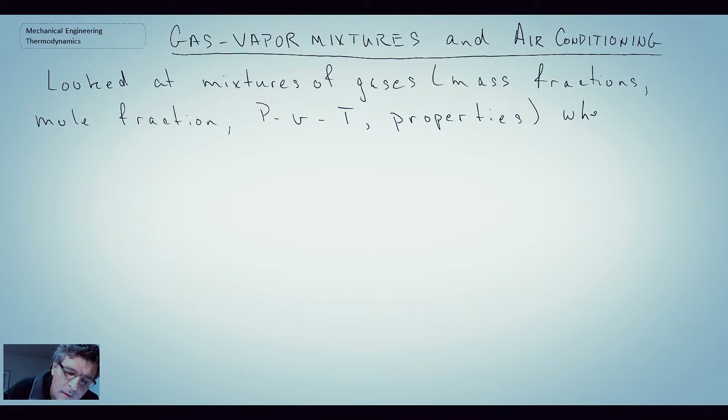So we're now going to look at the situation where one of our components can go through a phase change. And I mentioned that an important application of that is the mixture of dry air and water vapor, which pertains to heating, ventilation, and air conditioning systems.

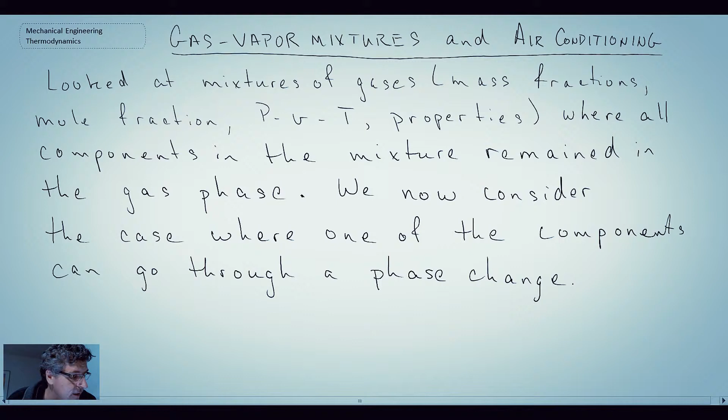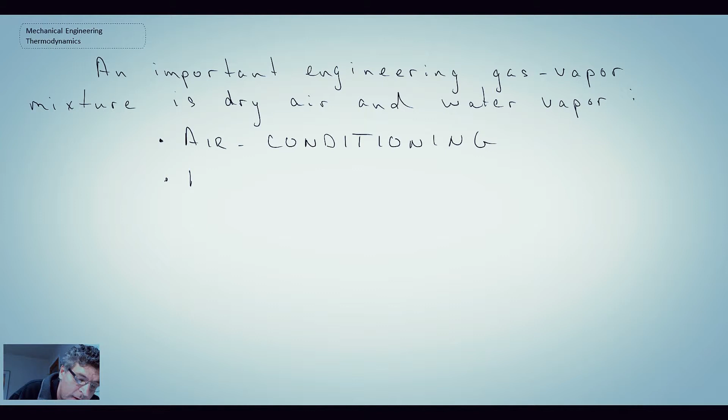So air conditioning is one of the applications. Another one that we won't particularly or specifically look at in this course, however it is important, is atmospheric sciences.

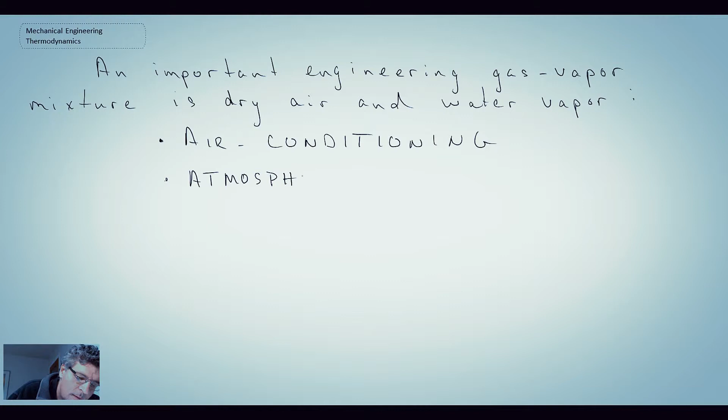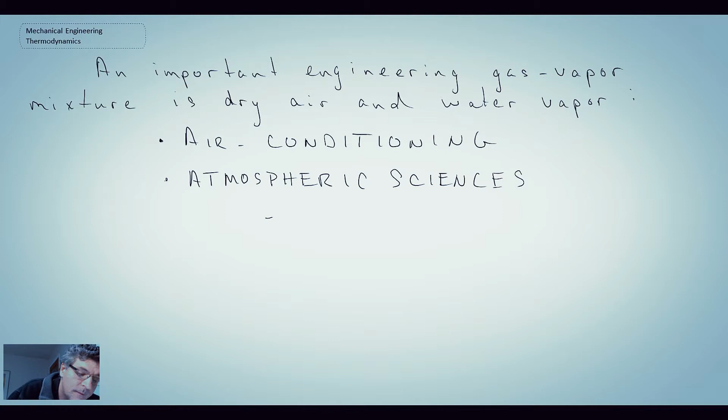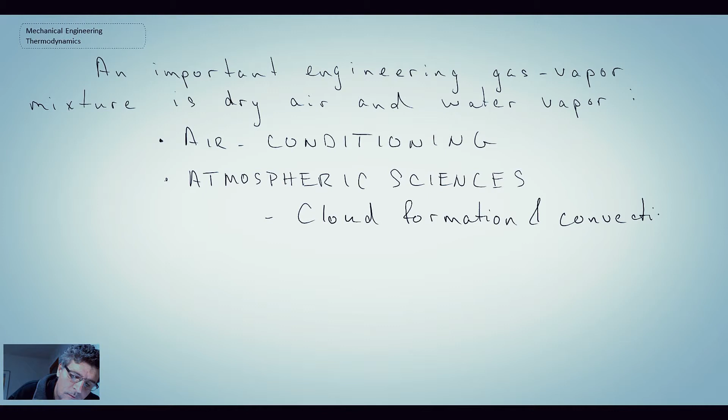Processes such as cloud formation, short and long wave radiation, or radiative flux coming from the sun and then energy being radiated back into space. That all kind of couples together with climate change.

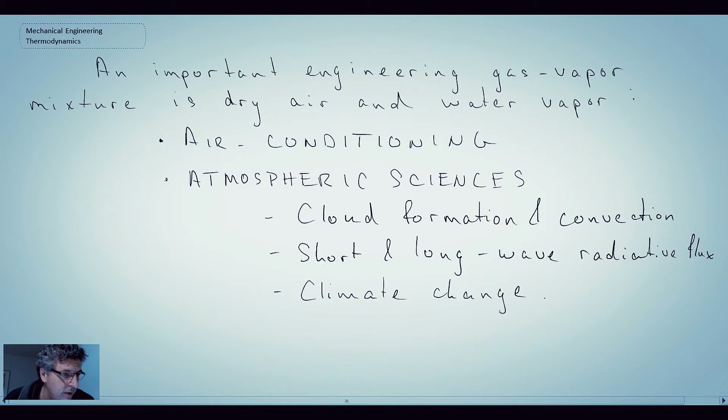So when we look at global climate change, one of the big uncertainties is the contribution of water vapor in terms of the modeling efforts, and consequently this is quite an active and important area for people doing atmospheric science studies. We won't be looking at that in this course.

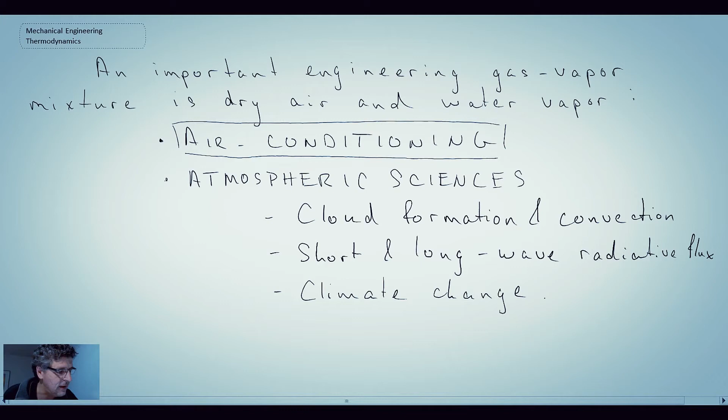What we'll be sticking with mainly is dealing with processes involving air conditioning, which is typically where mechanical engineers would contribute in this area. But as we're doing this, we will be considering air to consist of two parts. One part is dry air.

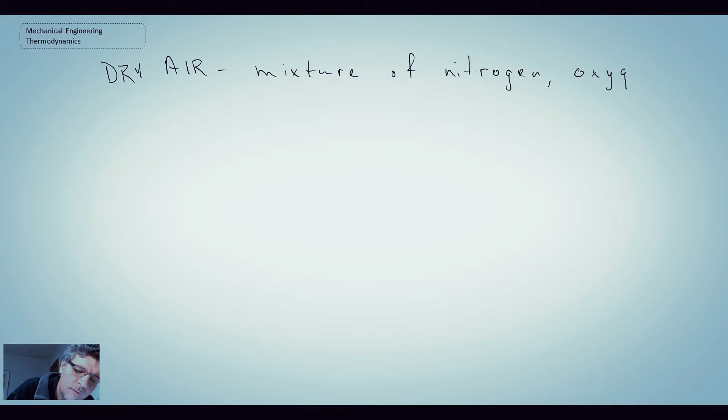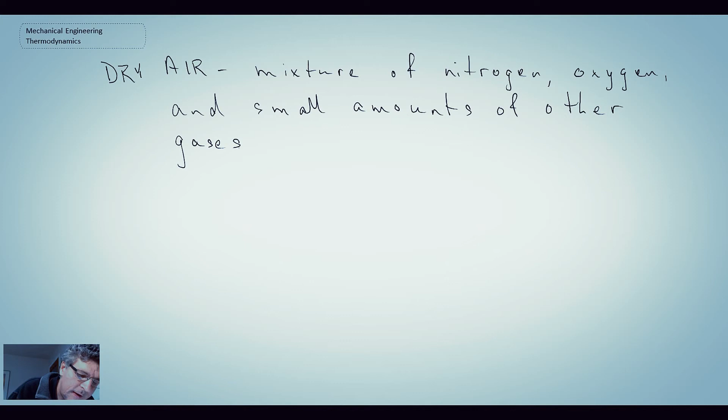And so this is typically air as we usually think of it. Typically we think of air as being mainly nitrogen and oxygen and then small amounts of other gases. However, when we talk about dry air, we are implying that there is no water in the air.

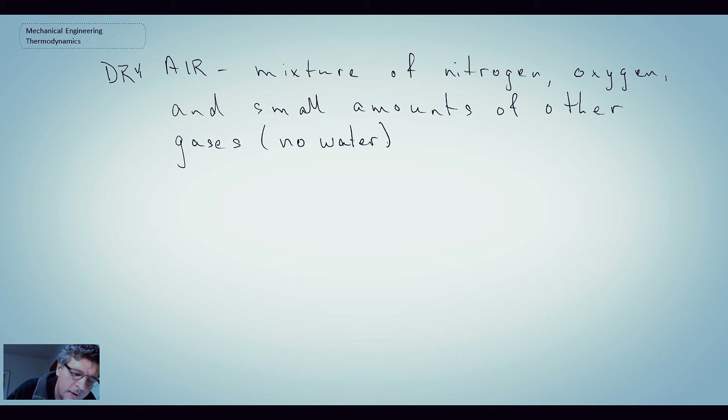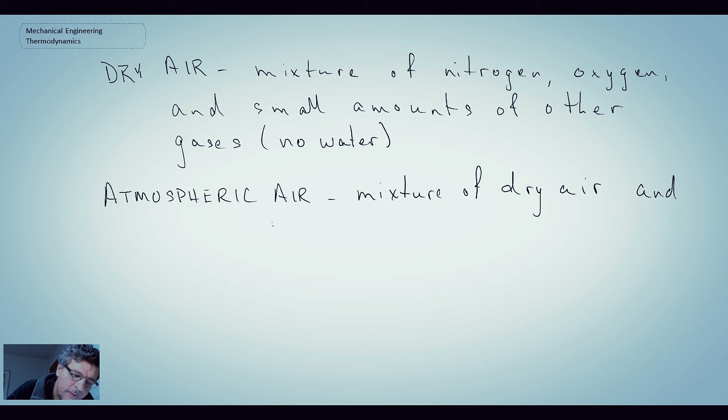Atmospheric air, on the other hand, which is what we deal with when we're doing heating, ventilation, and air conditioning, is a mixture of dry air and water vapor.

So what we're going to be doing is taking a look at how to handle problems. In particular, we'll be looking at how to apply the first law and perhaps entropy generation, but mainly the first law in heating, ventilation, and air conditioning applications. And in order to get there, we need to come up with the equations that enable us to determine things such as enthalpy and other properties of the air that consists of dry air and water vapor. So that's where we're going to be going in this lecture, actually in the next couple of lectures.